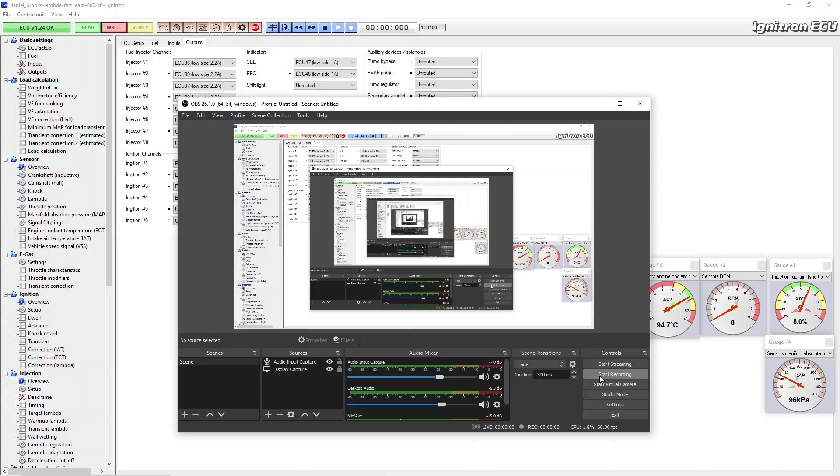Okay, we're recording. What we're going to do in this one is just how I go about boost control. We're on a dyno. It's a GTX 3071 on this car, internal wastegate, forged pistons, rods, etc.

Now you've got choices to start. I've done some adaptations so far off boost, so I've got these learned values which I've actually applied to the VE table. So I'll reset them before I forget. So you've got a VE table that's looking a bit like this. So it's got the beginnings of it.

Now I've actually gone up to 4,000 revs, just rolling on the throttle progressively, just about into boost at 0.4 bar, so 140 kPa this row. And that'll do because it's steady state. It gets things hot really fast.

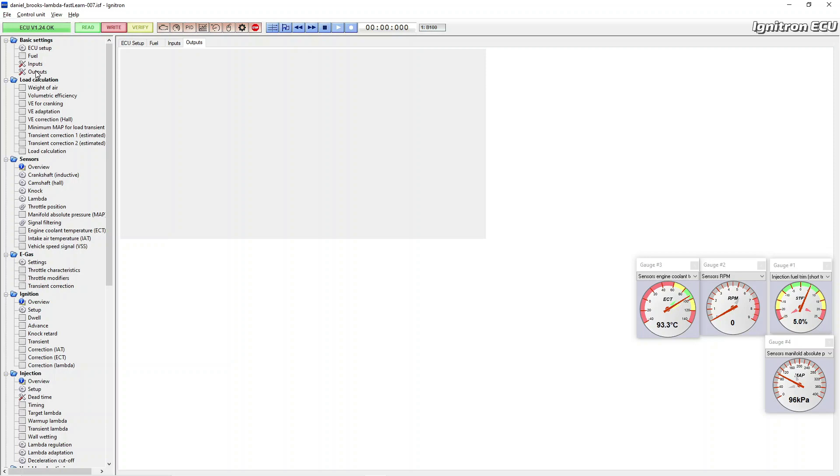So you've got a choice on boost control to either unplug your N75, so you're on actuator pressure. So you can do this on outputs. So turbo regulator 104 is its normal configuration. So that's how it would be if you just done a wizard setting. So that would have some boost.

So you can turn it off either by unrouting it or unplugging it. Unplugging it will pop up a fault code. Unrouting it won't. But if you unroute it, you also lose the boost control menu because it has no turbo to control. So there's different ways of doing it. I'll put it back routed, and I'll do it via the actual boost control menus.

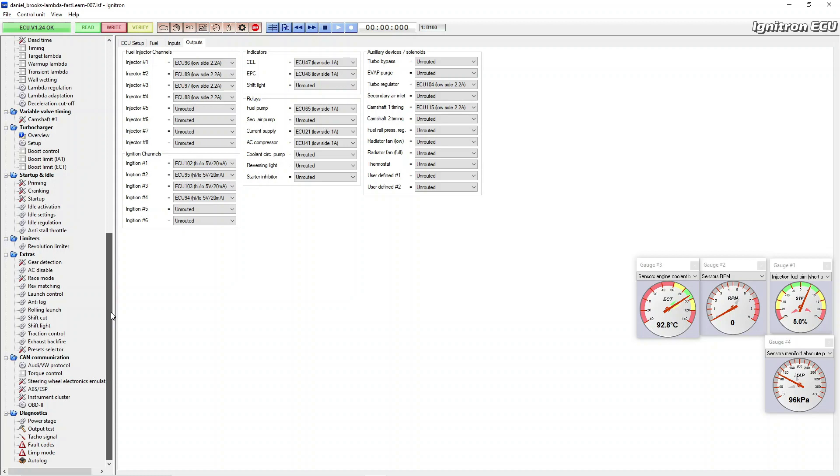So turbocharger, boost control. This is currently only set for one map, so preset 1. I don't know what PSI actuator is in it at the minute, but what I'm going to do is set all the duty cycle tables to 0. So we're in integrator min at the minute, that's set to 0. I'm just going to make the whole table, copy paste, make it 0. Likewise on integrator max, pick a 0, copy it, paste it everywhere. So you can't have any duty cycles.

The default setting is for 250 kPa, so 1.5 bar. I'll leave that for the minute because you can't do it anyway. Don't forget to write that in. So this will give you no boost. So the same as unplugging it or unrouting it, but without the fault codes. So we can embark on starting the thing.

We're on the dyno at the minute, so there's background noise. Hopefully this microphone thing will do a good job of muting noises.

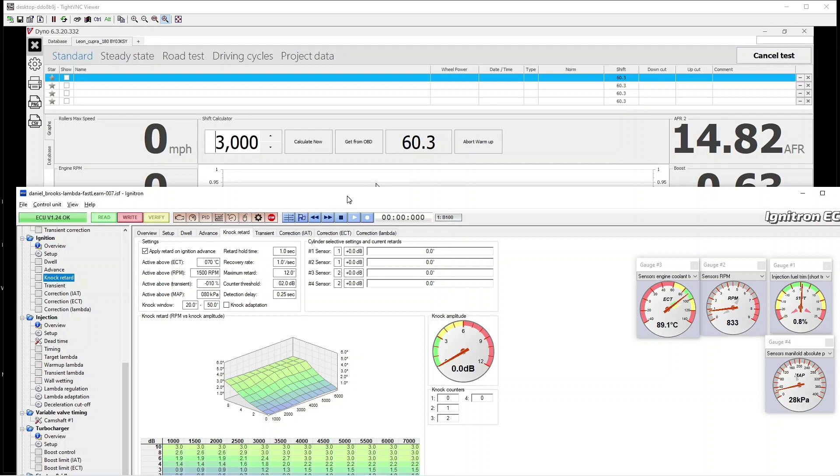So let's go into this, go to 3000 RPM. Tell the dyno, calibrate the roller speed, go back into ignition, drop the screen a bit. Now what I generally look at, because it's an unknown, I'll put it onto the ignition knock retard, just in case it's going to be active, and I'll be looking at if anything's going on in here. I've already created some gauges: coolant temp, just in case it's hot, RPM, short-term fuel trims, and boost kPa.

So just to get it to 3000 RPM. Fifth, teach it, and we'll do a sweep run. Beepy noises in the background from the brake system. Only the front wheels are turning. Not running the dyno linked yet. So where are we? 2,200 revs. Build them up. Get it to 3,000. Teach it.

Sync. What I'll do, dyno stops, do a sweep run. Whether I do full revs or not, I don't know. See what the fuel trims do, if there's any knock intervention going on.

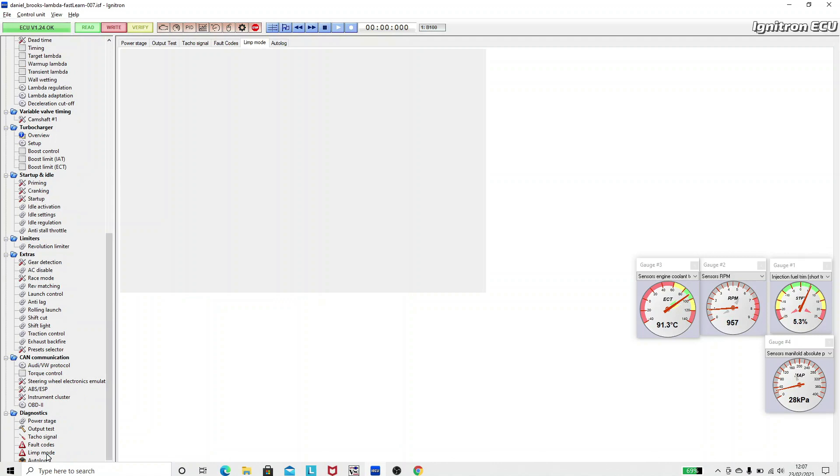One thing I will do, just because I can, go into limp modes. Yes, it's got the default. I always set this down to something less, half what the standard is. So there's three retards, constant cylinders. Just write that in. We'll drop into limp. I always do limp at 25% throttle, no turbo. Write that in as well.

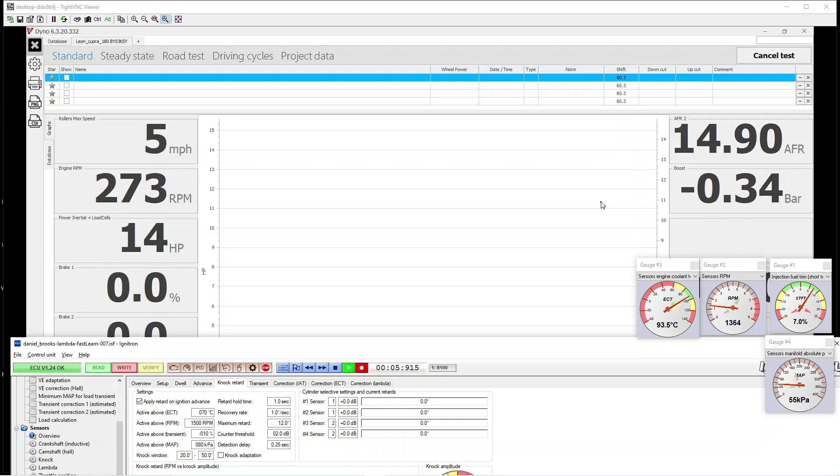Okay, we'll go back to ignition knock retard. Shrink the screen again. Now I do actually start a log so you can see what's going on. Dyno's sat there waiting for me. So let's do a sweep run. Fifth gear, full throttle.

Letting it go down. A quirk of this dyno is even though it's in braked mode, once you've tipped and taught it the RPM, the first run never has the brake. That's it. We'll restart that.

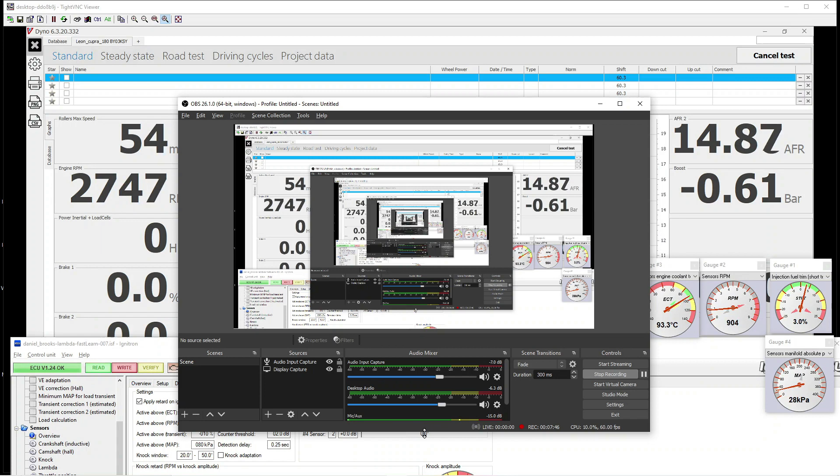Pause this a moment. Okay, should be recording again. We are. Laptop's playing up a bit. So I'm still recording.

Right, so turn this off. Let's do another run. Still logging. Goes down. Stop it. Log that. Log.

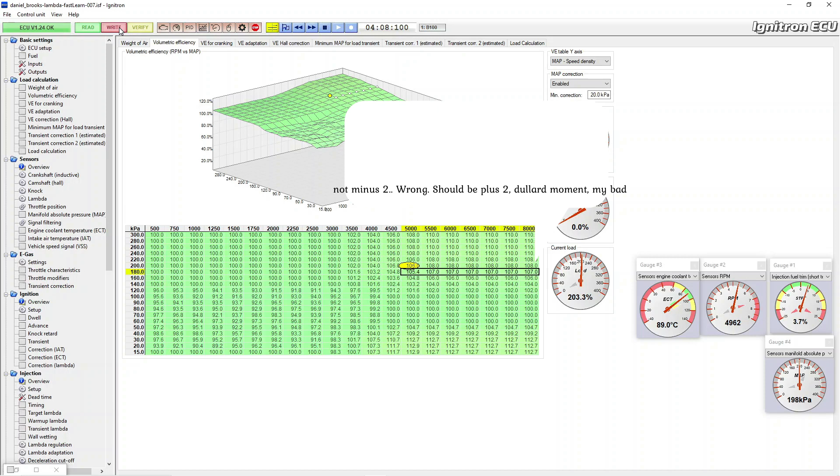Write into ECU, and that was actual data. I did see there was some timing correction going on. We bring the log back up again. So we go to ignition, and a tiny little bit of knock going on there, number 4. So again, same thing. Want to see what's going on in the actual tables. Click the top thing, look at your advance map. And you can see exactly where it didn't want the timing. So right in this range, it was kind of happy here, and less happy up here. So a degree out. It's not the end of the world.

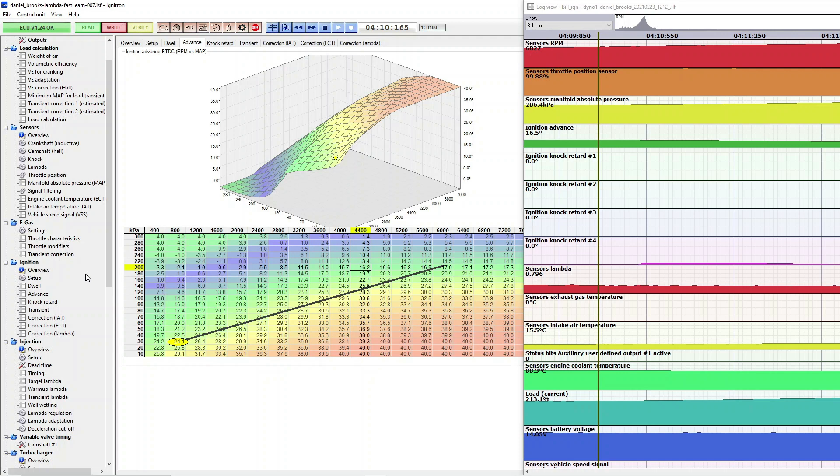I'll actually just highlight that row, nudge it back half a degree, and back to 17. Write in. One thing that's on there is target lambda. We'll rescale this. Okay, well, whilst we're here, I'll rescale this. This only goes up by default to 220 kPa. We're going to be above that, so I'll rescale that.

So double click, have that 300 kPa, 280, 260, 240, 220, 200, like that, 150, like that, 100, like that, 80. So that's rescaling the axis. We've got full axis for fueling. Now we've been in this zone. Just now it was up in the top row, so that's 0.8 lambda, which is a ton of fuel, not a hard boost. So this time we'll be actually operating around here.

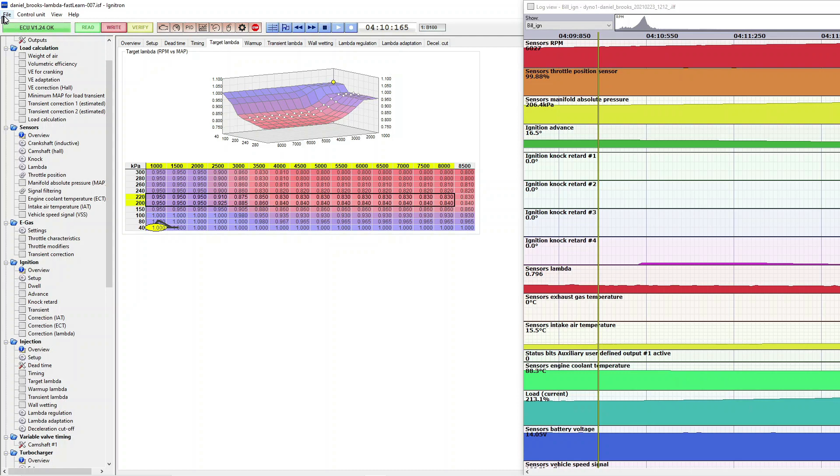So to write it, file, save as, next version. I generally do this, I can always roll back if I screwed up. Yeah, trust me, you're going to screw up. I know I do. Fat fingers on the keyboard mostly. There we are. So that's going to not retard. Minimize the screen again. Just going to get rid of the first run because there's no brake on that.

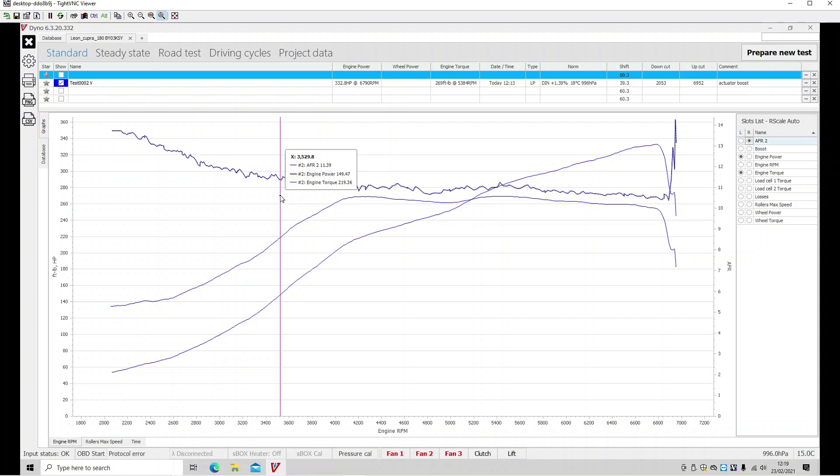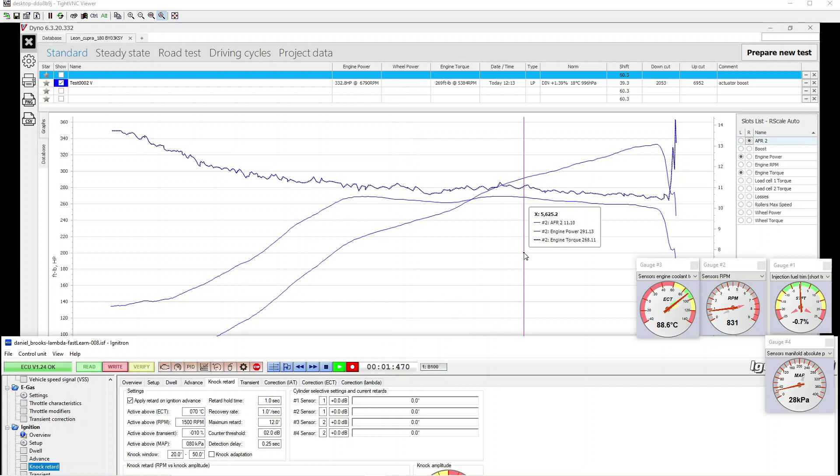So yeah, balance of power 332, 269 torque, boost did the creepy thing. Worse this time, ironically. And AFRs were fat, tens. Okay, car didn't think it was tens. I suspect there's a lambda issue going on in here somewhere. We'll rerun. Let's have a look. So, start recording. Prepare test. Let's go again.

See on the trace on the screen, lambda did go leaner. The target lambda was told to go leaner. Still a difference between what the dyno's measuring at the tailpipe and what the car's reporting.

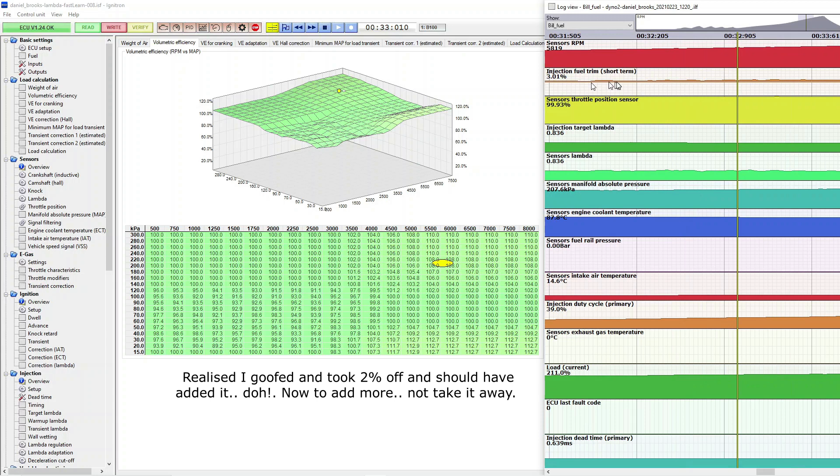So, looking at the top screen around. So adding 3, 4 to 4%. We're adding there. 2, 3. Okay. Right. Add 2 back in there because I took 2 out and I'm stupid.

And on this bit, add 7. That looks a bit heavy. Let's go back a bit. Let's do that. It's back to what it was. Okay. The top end it was actually putting fuel out. It's limited region, don't worry about it for the minute.

Ignition wise, 4 doesn't like it, does it? Still 1 degree. Keep an eye on that. I'm not going to worry about the degree at this point, at this boost level. It's further up the rev range. 6, 6.

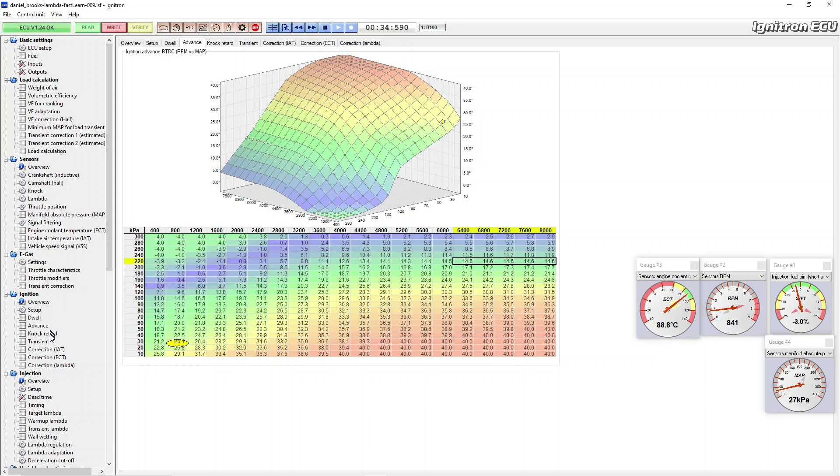Yeah, begin to write your changes. Tip: if you're idling and you do a write, sometimes it will stall out, so you would blip the throttle when you write, so it doesn't stall out. Save as. Back. Okay, so back into knock retard. Shake the screen a bit.

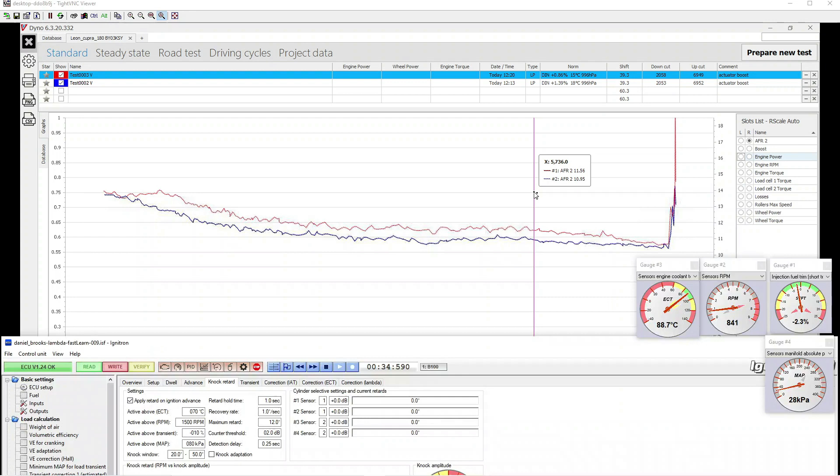Back on the dyno. So let's look at specific things. AFR. Okay, so it did lean out because I told it to. There is a significant offset between what the car's seeing and what the log's seeing. Let's go back into that. Full boost. Target lambda. The car thinks it's doing 0.83, 0.84. Bang on. 0.84.

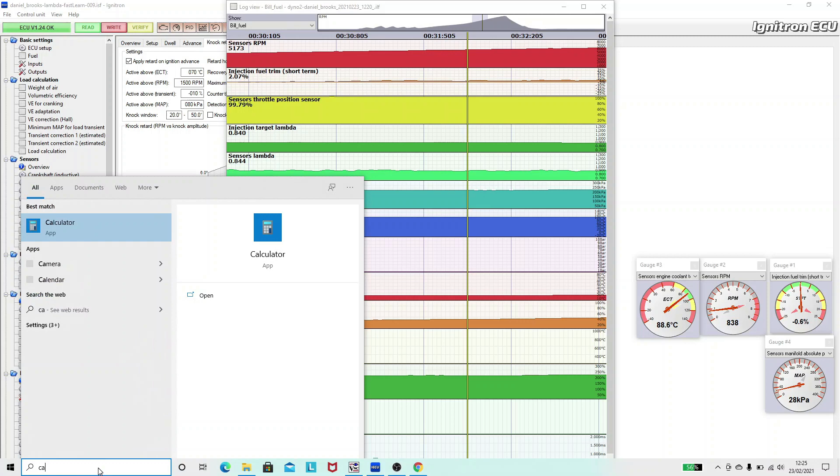So 0.84 times 14.7, AFR 12.3. Miles off what goes into the dyno. So we go to the same RPM point. So we're at 5173 RPM. We're at 11.7, 11.8 AFR versus the car thinks it's 12.3. I suspect a dicky lambda probe. Car's all mine.

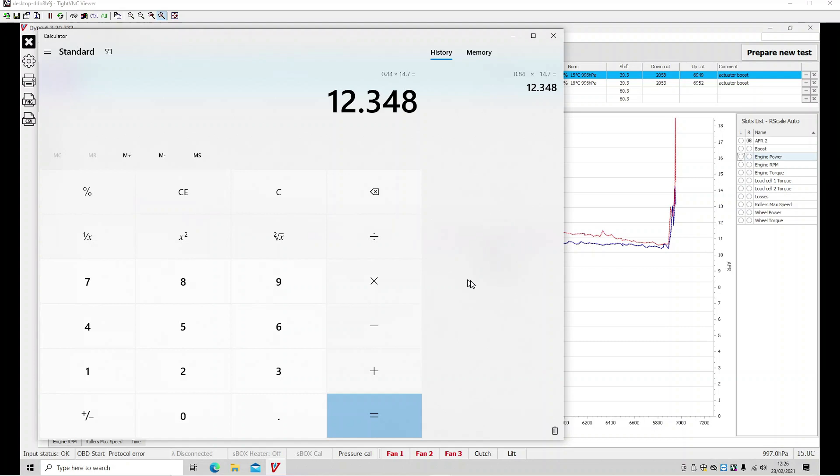Right, we'll rerun it again. I do have other lambda probes for the dyno. So let's prepare new test. Back into here, let's go low, we don't need that. Let's minimize this. Start recording. And again.

Yeah, interesting. So I was watching an actual dyno AFR gauge then, as well as the dyno measurement bit of it, and they track one to one, so there's no weirdness between output AFR from the gauge to the dyno. They are spot on. But the car is saying it's leaner than it is. Save that log. Dyno.

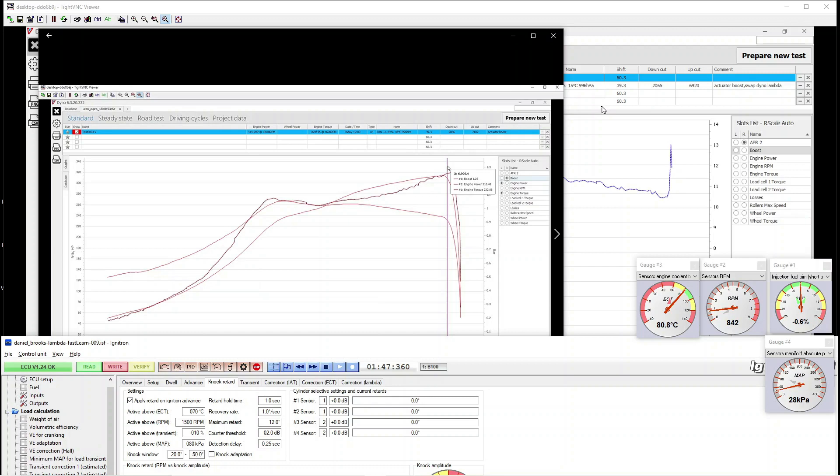Okay, we're back. Changed the lambda probe since the first runs were done. This is one of the last runs. There was an offset between the dyno lambda probe and the car's one by a reasonable amount. So in AFR terms, it was 11.5 on the dyno and reading 12.3, 12.4 according to the engine lambda probe. And we've changed that probe now. So this will be the first run after. Hopefully it will run leaner according to the dyno now, because it was running rich before.

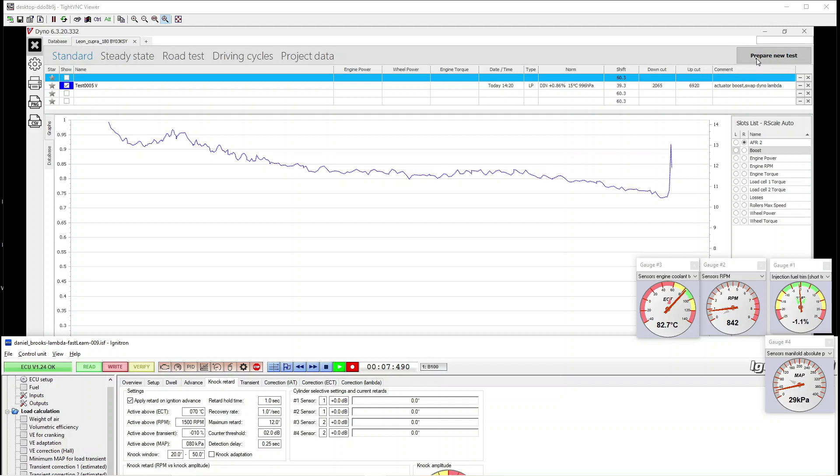So I'll just prepare a run. Not done anything. Just write a note in the dyno. Here, car lambda. I'm going to go for a run. Let's get this back. No, let's get ignition back on screen. We're recording already, so first gear, second gear, third gear, fourth gear, fifth gear, full throttle.

Stop this right this moment. Car's coasting down. File, save log. Dyno, lambda, car. Just open that up. What do we see? Trims. There we are going rich. Lambda 0.82, the 1.4 bar, because of the creep, 1.6 bar, because of the creep.

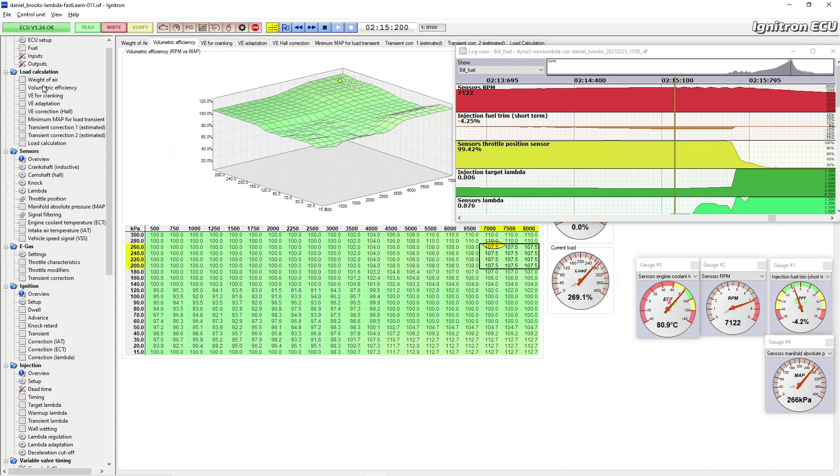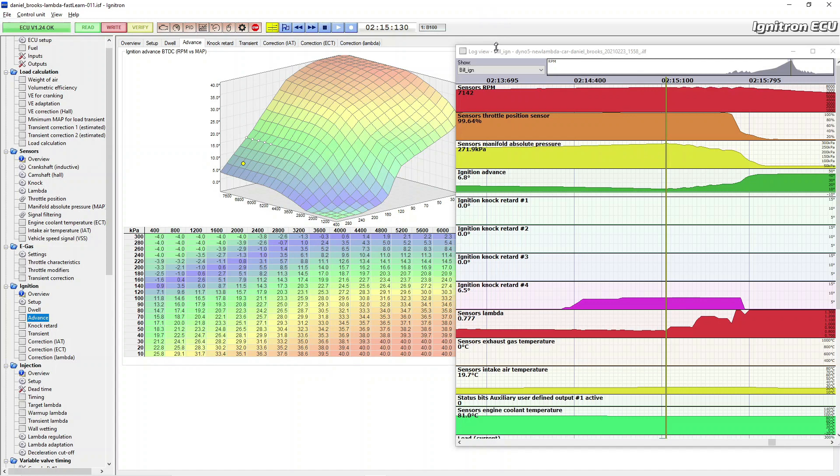Knock going on. Yikes. Yep. Number 4 is not happy. It's only 7 degrees of timing. Shit. Pardon my French. That's not good. Not a good sign. Advance. This is where we are. That run. It's not feeling the love. Cylinder 4 at least.

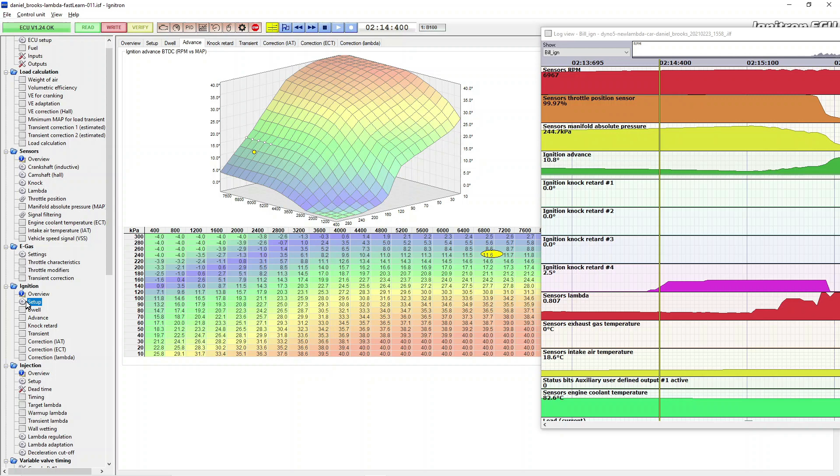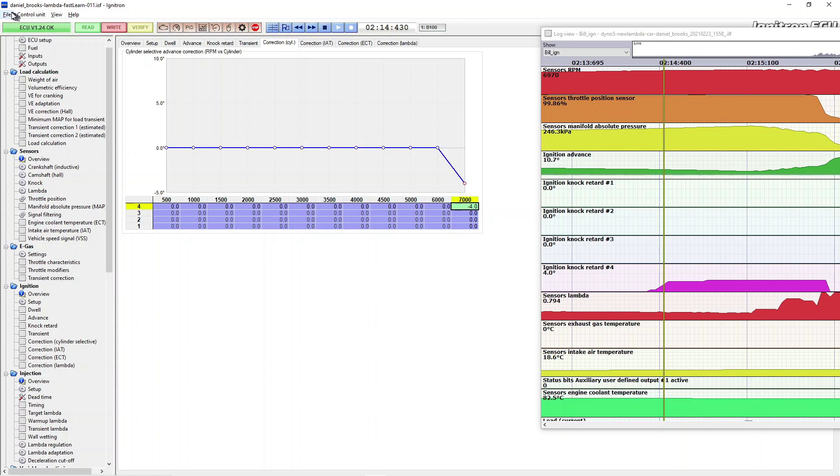What I'm going to do is just enable cylinder selective correction, given that cylinder 4 is being a bit of a wimp. So kind of high in the revs, it's 7 and above, it's unhappy. So I'm just going to stick -4 up there, number 4. See if that does anything. Right, no, stalled it. Start again. Okay. Save.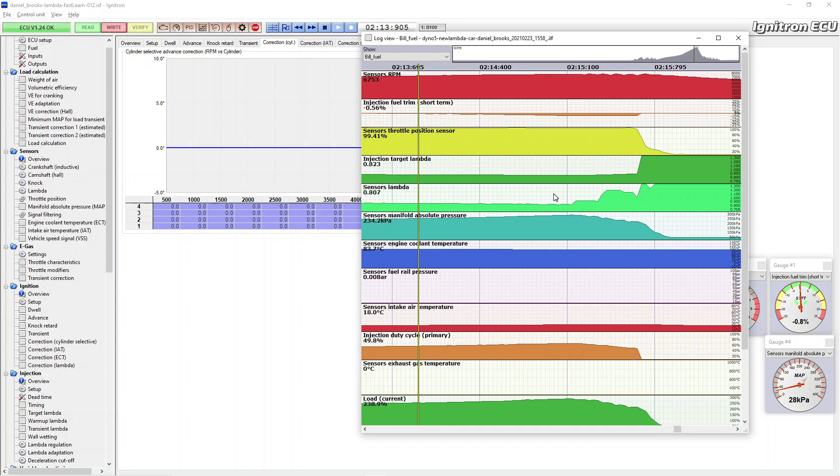Right, let's rerun this. Just check on ignition again. Fuel. Okay, so do record. We'll look at knock retard. So last run we did was number 6, the red one. So just get the other one off screen. Do a repeat run. See what happens. Okay. First gear. Second. Third. Fourth. Full throttle.

See on the screen then, number 4 still lit up. It's disappointing. Save that lot. Dyno 6. Wrong one. Plug. Oh. There she goes again. Yeah, number 4 is not happy. It's 1.5 bar, and this is just actuator pressure. Jesus, 1.7 bar. Really?

Go back into boost control. We can see if we were running boost control, it's 250 kPa. We've got no duty cycles. None. None at all. And she just runs away to 1.7 bar now, nearly 1.8 bar. Ridiculous. Okay. Maybe some investigation. We'll plumb it direct, bypass the N75 valve in case that's just plain wonky. Yeah, it's not like in boost. I'll stop that for the minute. We can carry on. So I've replumbed it for direct actuator pressure, no N75. See you in a bit.

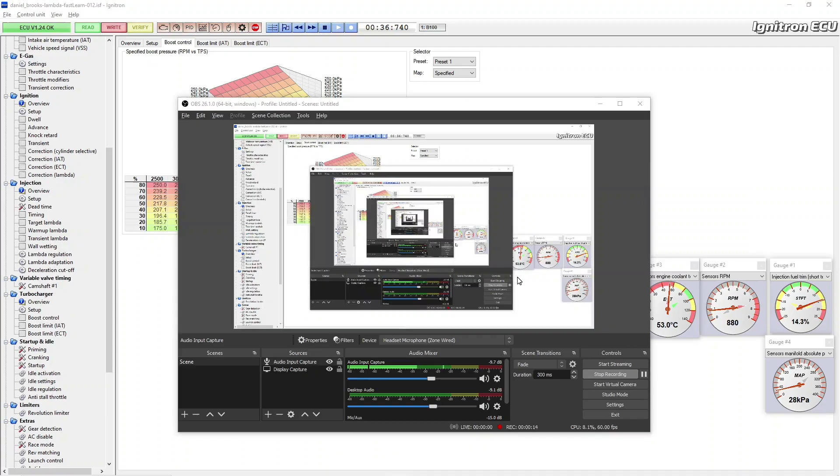So back to the ignitron screen. So this is like the default boost request, boost control. It's on preset 1, there is only 1 currently. If you recall, I'd set integrator min to 0, I'll leave that there, and integrator max I'd also set to 0 to essentially give us no duty cycle. So we literally are wastegate pressure, obviously with creep. From experience, I know that 1 bar, I'd start off with something like a 30% number for a duty cycle. So I'll copy that and plonk that in the top row. Be 0 at the bottom. So I'll just do a linear thing, vertical interpolation, give ourselves a flat looking duty cycle map.

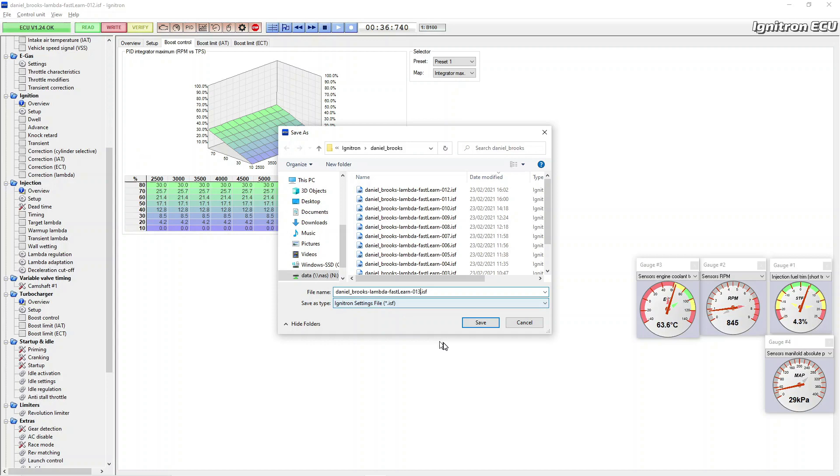So this will be what it's going to use as a duty cycle to the N75 with its PID control as a starting point. I'm going to leave the integrator min at zeros for now. I just concentrate on the max. So I'm just going to write that in, save it, next version. One thing I need to check is, well, actually the limits set to boost requests. This is inlet air temp, so we're allowed 1.6 bar, that's enough. Engine coolant temp, we're still a bit cold at the minute, so it's not going to allow us full boost until we get to there, but then when we do, we're at 1.6, that's fine. Car's still warming up anyway. Limp mode's the other one. This is set to 250, so we need to give ourselves a little bit of headroom on this. Not too much. We'll give ourselves 265, just for some random number.

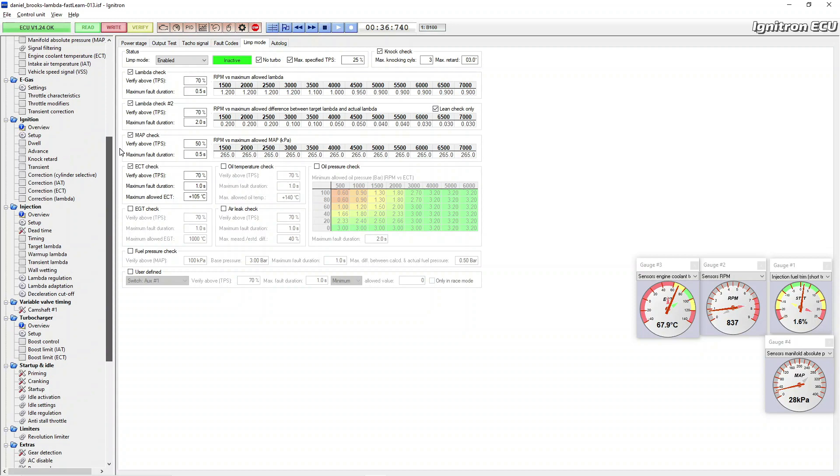Again, save that. Map check. 2 seconds is too high to my mind, so half a second. And I personally prefer about 50% throttle. Everything else is kind of alright, so save the file. So I'm going to go back into knock because we are very knock limited on this engine. Seemingly it's a 160,000 mile block with some Wiseco pistons dropped in and honed. I won't say any more on that matter. So we'll do another run.

Prepare new test. So this one's going to be 250 kPa, which is our boost request. We'll see what it wants to do with it. We'll start that. We'll start recording and turn the main fan on. Okay. First gear. Second. Third. Fourth. Nice of that coolant temperature to get up to 70. There we go. Bingo. Full boost. Full throttle, I should say.

Okay, it's coasting down. Save that log. Dyno 8, 250 kPa. What the boost duty cycles are doing. Okay, so look for my boost template. It's wider on screen.

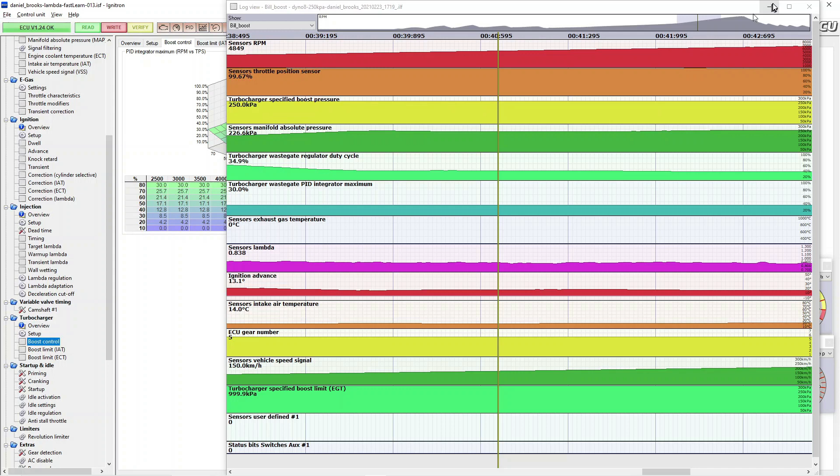So what we can do, we go back into our boost control. Here's our duty cycles. Essentially, you can just give it some more. I'm doing highlighting on that. So we're at 30%. We're not doing it. I'm going to give it 40%. Flat 40. To write that in. Doing that's quite laggy.

So we could, if we wanted to, increase these numbers. We won't in a minute. I'll get a feel for what that 40% actually does. So we're going to do another run. Start recording. Get the log. Oh no, I'm recording. Let's ignore that. So, log's recording. Let's go back into knock retard. Squeeze the screen a bit.

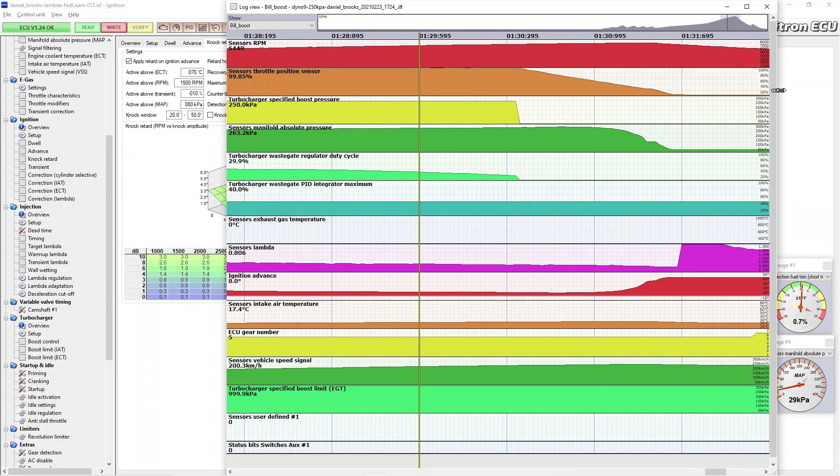Up and along. Let's get to some boost. Scroll down some RPM range. So, 5,000, 40%, still not quite making it. We did more boost, so we're up at 240 kPa. We're into the creep zone now, so 40% was adequate at 5.7, only because of the creep.

So if we're going to add duty cycle, we don't need to add any duty cycle after 5.5, because it's running away at that point. We can put some duty cycle in earlier. So we're at 40, 41, cap of 40, 4,000, we're still only 1.2 bar, so we can afford to give it more headroom. So a quick check on fuel. So we've got some more boost. Engine's looking decent, adding a little bit.

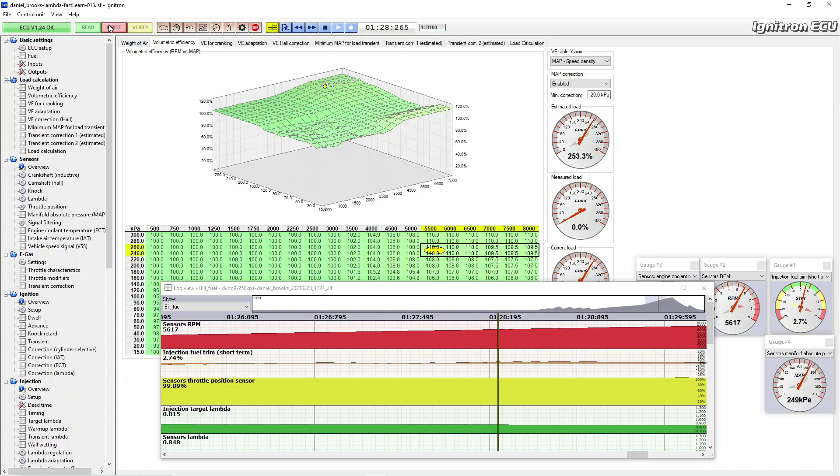Let's have a quick check of how's the ignition doing. It's actually gone quiet. Interesting. So I suspect the knock that we're seeing is a little bit still there. Number 4, full revs. I suspect we're actually just seeing piston slap. High mileage engine, drop-in forged pistons, clearances are not going to be correct. It's going to be very baggy. So it is quite a mechanically rattly engine.

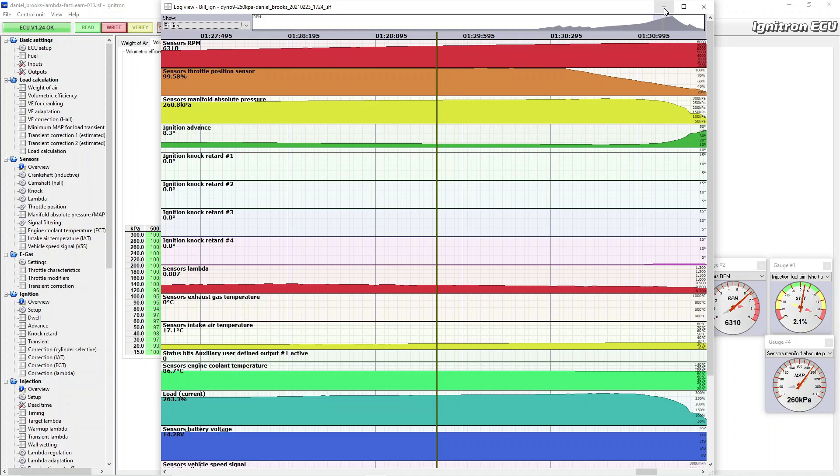So knock sensors, good as they are, mechanically noisy engine will influence them. So go back to boost. Boost control, duty cycles. As I said before, after 5 and a bit, it's doing all that it can because it's running away. But we could do a bit more duty cycle early on. So I'll nudge this up to 45.

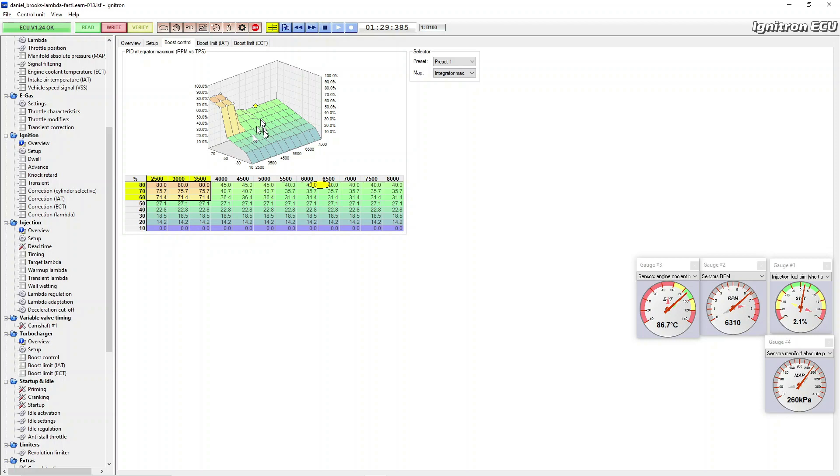Now, and to try and get it going sooner, I'll actually bump these up quite a lot. Try and get the wastegate nailed shut. Really, that. Nudge this up. Bring that slightly down. 43. So see what this does in terms of spool. Save the file.

To not retard, shrink the screen, hide the previous runs, don't really care about them. So lose that run, so let's compare the last run to the one before, boost for boost. Okay, so you can see we did get some more boost, 1.55, then it fell away a bit, and then up to here it crept by 3, so this is our operating range. But we did make more torque, so up to 324 torque now. I'll take that. Okay, so that's just the last run, let's go again.

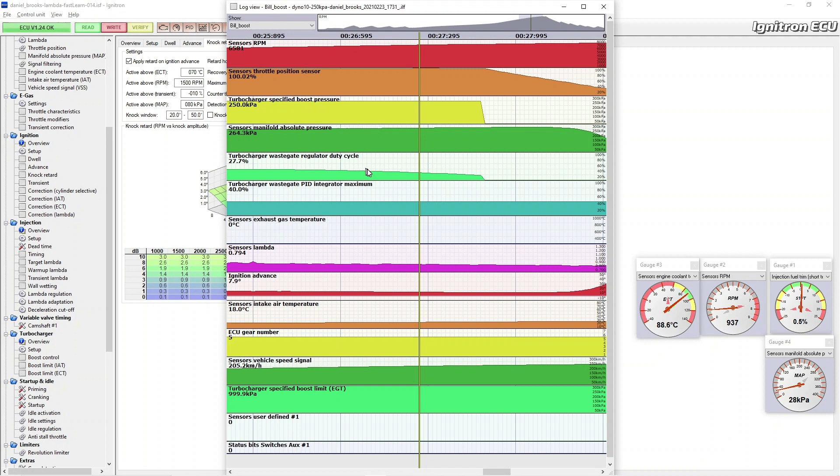Log. Yeah. Open the log. Okay, just boost. Wastegate duty cycle's flat, closed. 3.6, reduces down. Boost is climbing a bit, so we'll get to 1.5 bar at 4.2, using 50% of the duty cycle. Slightly go past that momentarily.

So not so bad. And we're still not enough. Here we are, 5 again. So we get a bit of a dip. So we have a bit of a spike. Drop back to 244 kPa. So that's at 4.8 RPM. What does the dyno say? Oh, look, there is a spike. Yeah, so we did spike. More of a spike on the dyno than there was, but that's because I've got the wastegate set flat. We get this slight wibble going on here.

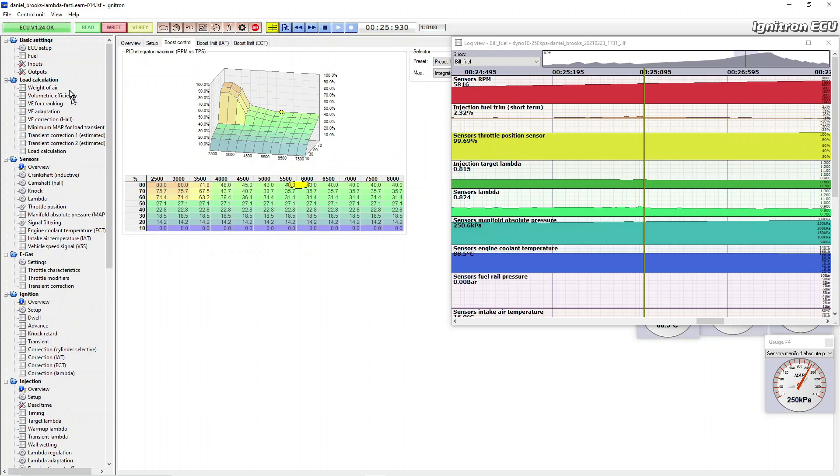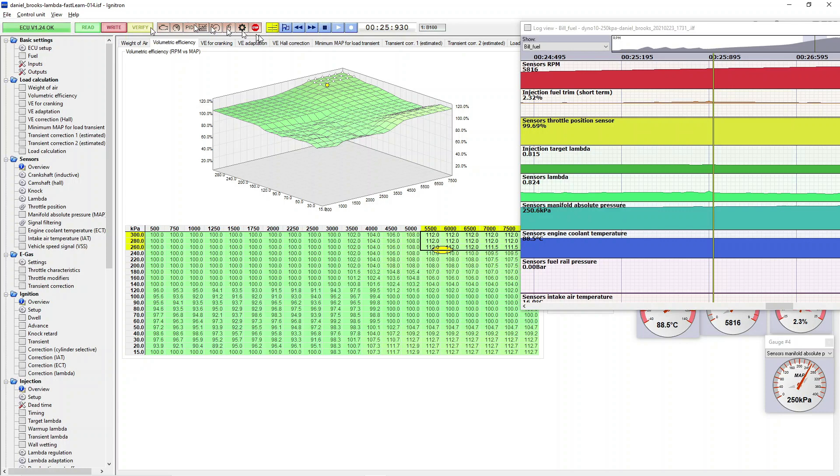Percent. Look what that is. Around here. Okay. Go up a couple of percent. Let's check what's going on with timing. Cylinder 4 still the problem child. No. But again, we've only got 11 degrees, 10 degrees, 9 degrees of timing anyway. Okay, that's a good sign. So we're just going to get a boost kind of where we want it. Let's do another run.

Some stuff. Not retard. Screen. Test. Hopefully got less of a spike. Find out shortly. Okay, first gear. Full throttle, fifth. Might look better. Well, yeah.

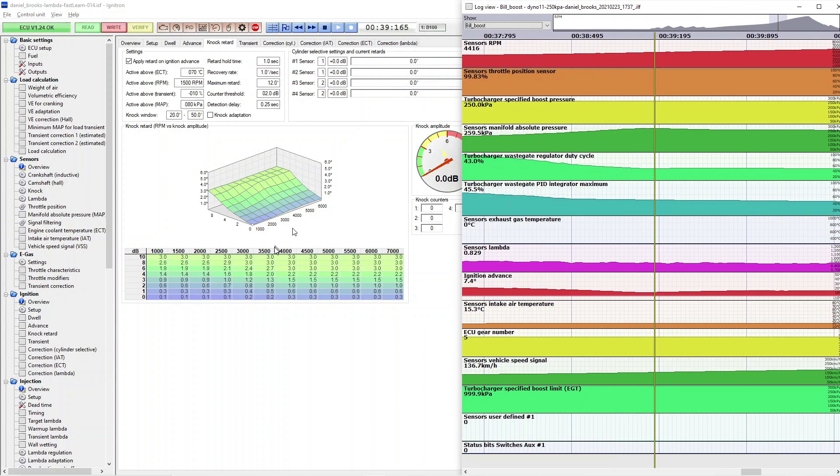Boost. Spike around 42. Less of a spike. Bumped to 260, as the dyno suggests. Boost. Let's lose the red run. Yeah, we did reduce it. Not a great deal, but we did. So, yeah, 0.1 of a bar. So I need to do more of that. So, back into control.

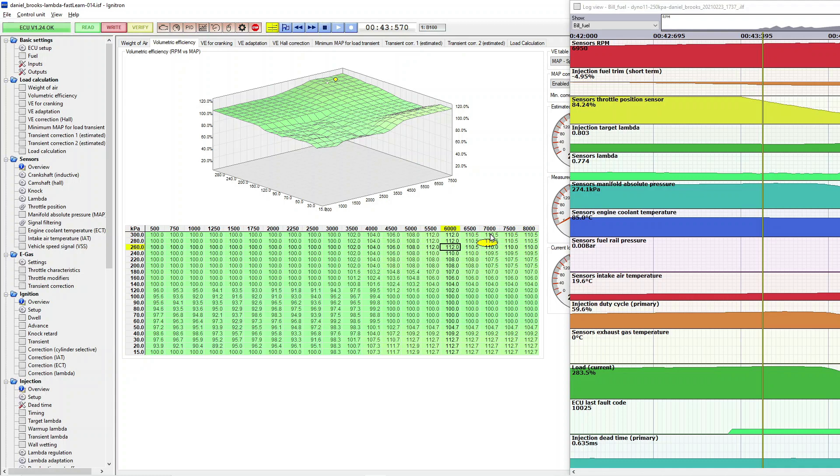Maximum 45 there. Bring that down to 43, like the cell next to it. This one too. Down at 45. Check the fuel trims. Fine until the limiter. They're really rich. Won't fuel up here, that's for sure. Likewise. Okay.

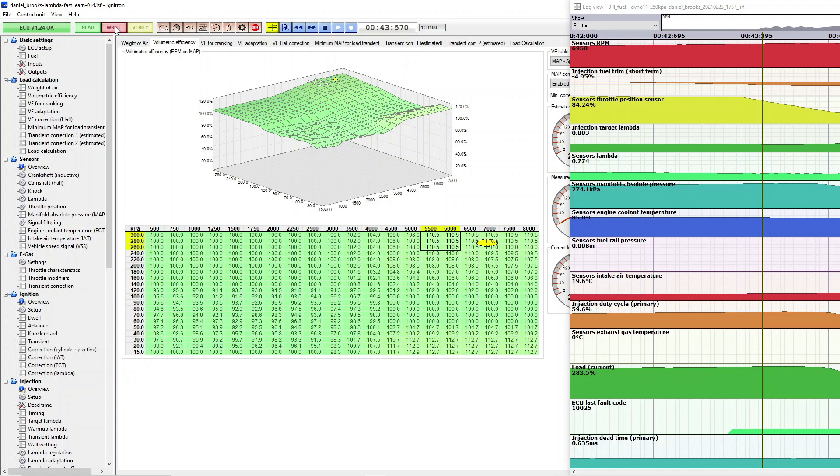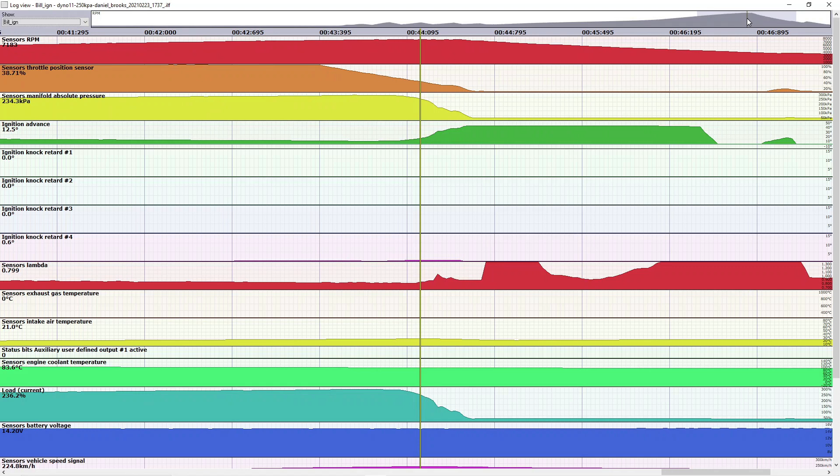And quick check on timing. Timing. Still quietly moaning. That's on the overrun. Yeah, which to me just really confirms it's more rattle than anything. It's on overrun and liftoff. Actually under load it's been alright. Okay, so save this. Let's write this. Save as. Next version. Let's lose number 11. Test. Go. Second. Third. Fourth. Fifth, full throttle.

Save the log. Dyno. 12% throttle. 250 kPa. We're climbing now at 4. A bump. We actually need a bit more. Interesting. Again, the bump's gone down a little bit. I've seen just a bit more of a bump there.

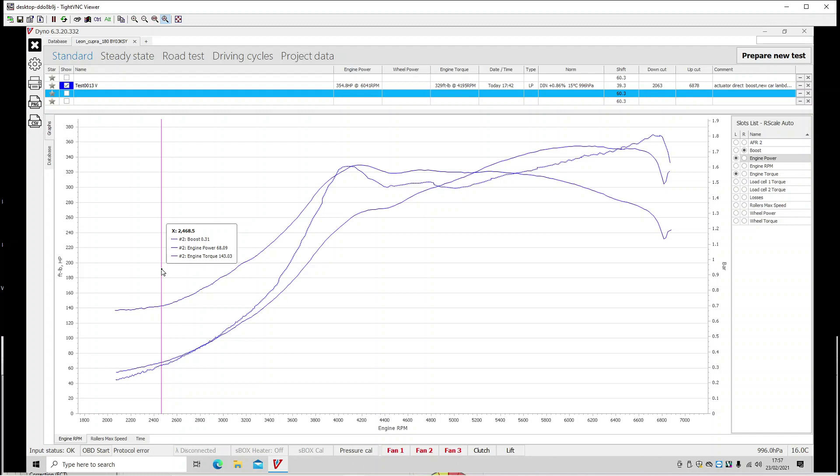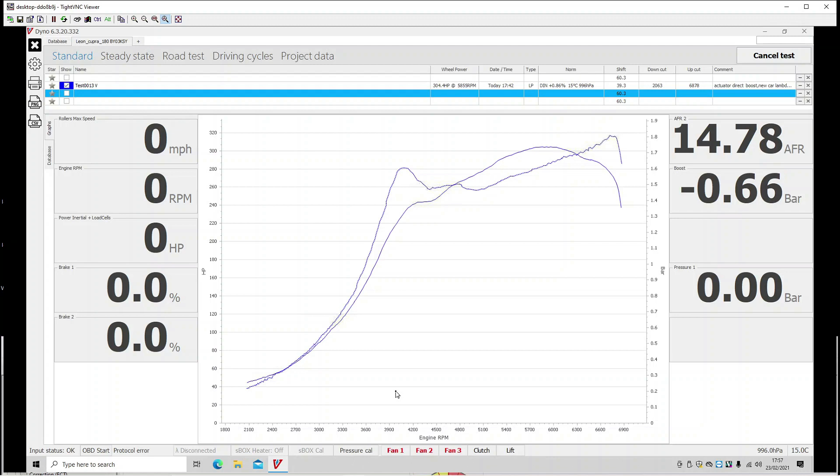The map sensor on the dyno is near the throttle body. The fuel pressure regulator before, but it's got a load of other stuff hanging off that. The map sensor on the car is closer to the map sensor on the dyno. So just redo a test. I have backed off some of the... start recording. Fifth gear, full throttle.

Didn't overboost. The dyno say 1.5 bar, fell away to 1.4. 5,000 revs. What did we have here? Same. Okay, so it's actually wanting more duty cycle now. 43 is okay at 4.4. And 5.6 is okay. So 4.4 or 5.6, a bit more duty cycle wouldn't go amiss.

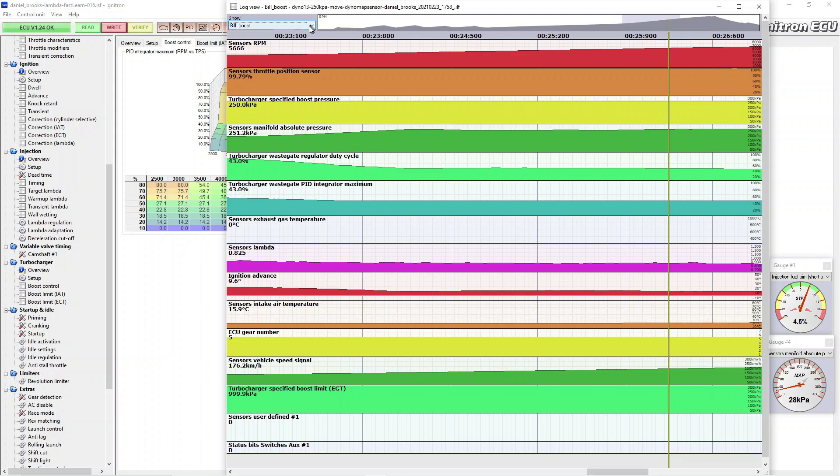Back into boost control. So essentially in this zone. Right, up that to 45. Same here. Like that. Check timing. First because I'm there. It's good. Ignition. Pretty good, apart from number 4 again. Just at the very top.

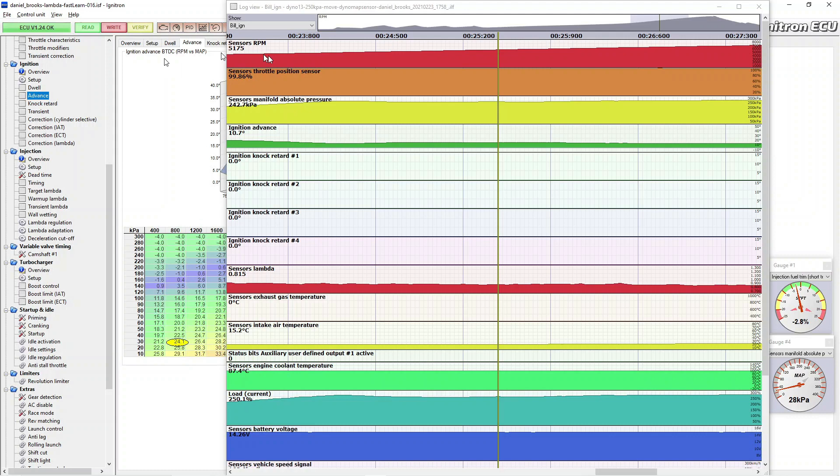What I'm going to do, just because I can, is this region. Add a degree. 5, yes, it's got to 12 degrees. See if it makes anything of that in terms of torque, whether it just rips it back out again as timing knock. So, save file.

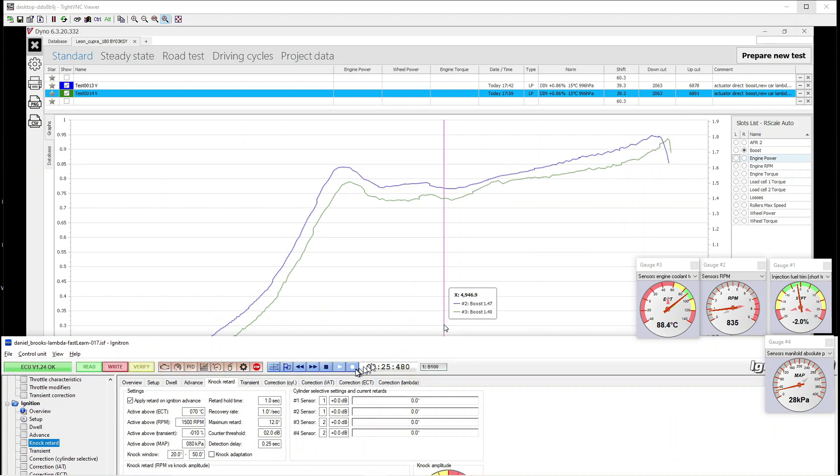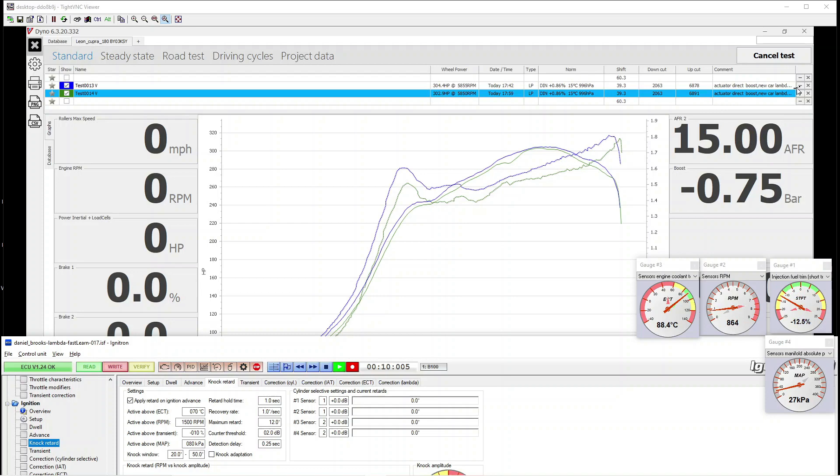Knock retard. Start recording. Test. Let's get rid of the run. Fifth gear, full throttle. So on the screen there, cylinder 4, all lit up like London. The other cylinders may have been fine, but something's going on inside number 4.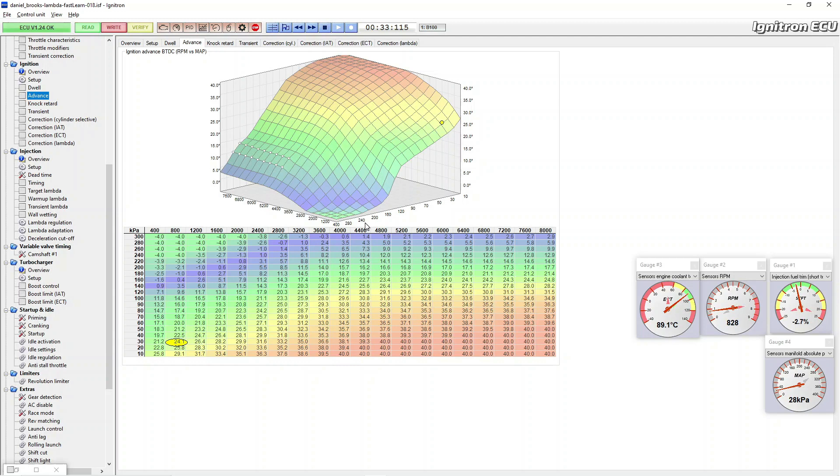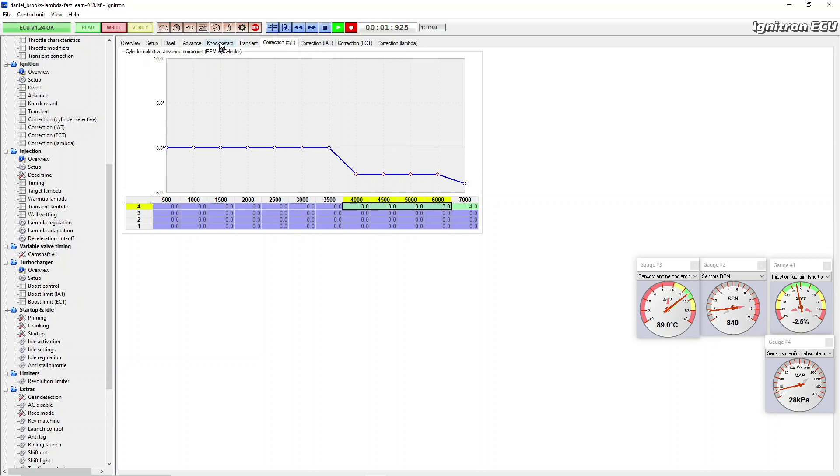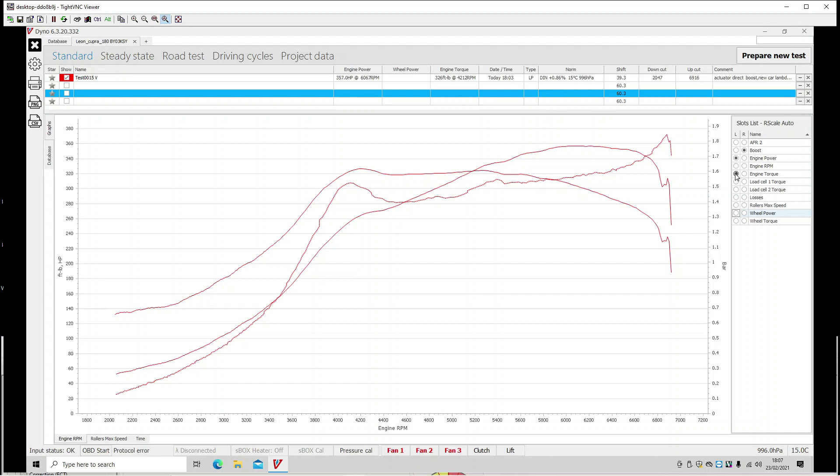Ignition. Go back into timing control and take back out what I put in, because number 4, no likey. Cylinder selective on it. Preemptively pull out 3, see if we can leave it in the others. Suspect it won't be enough. That. Okay, let's record. Up retard. Let's lose 14. Test, go. Throttle, fifth.

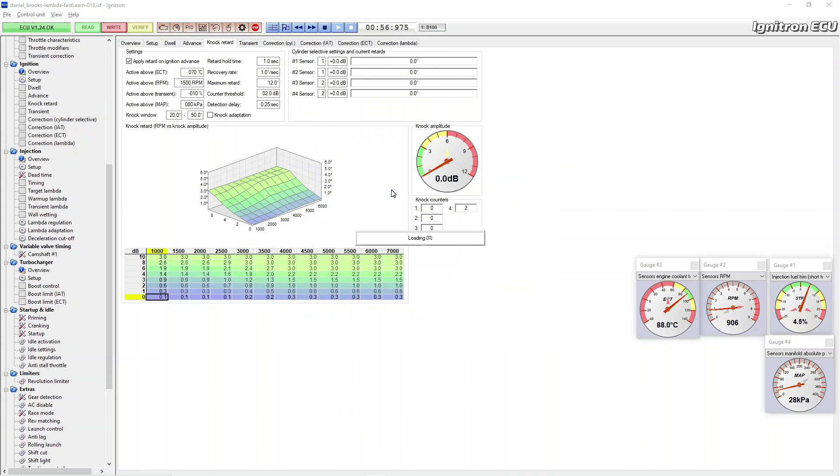Well, cylinder selective knock seems to have dealt with number 4, if that was actual real knock, or the retarding itself did nonetheless. Okay. So what's going on with boost? Right, one target there. Slightly above. Pulls it back. Pulls it back, a bit too far. 47. 48. It's a bit more back on target.

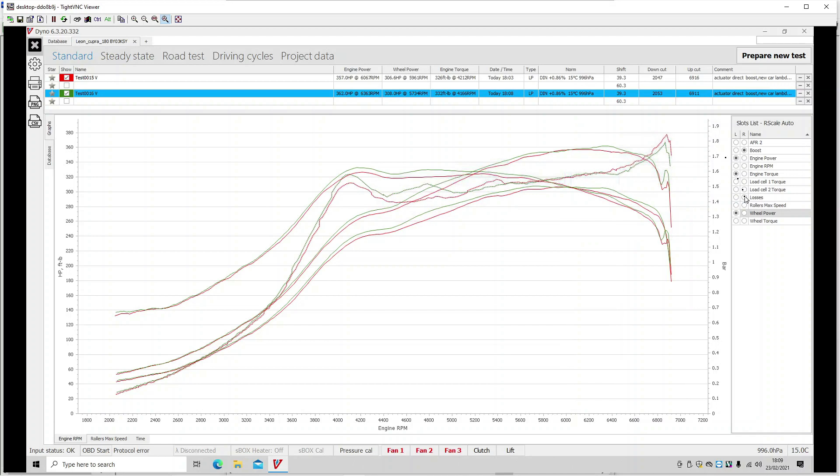So this log doesn't look too bad. The dyno makes it look worse, maybe. Green one's last run. To 1.5, that's 0.04. Resolution is making it look bad. So it's kind of getting there.

So, key points, just to sort of round up this video, could go on for hours, no doubt will on this car, is you've got a requested boost pressure, you've got an actual, you've got your actual N75 duty cycle and the integrator max that you've set. So it's a balancing act of the integrator max and achieving the boost or exceeding the boost by whatever amount. Then if you overshoot too much boost, the integrator max is too high, you bring it back. So you use that to dial in the boost control.

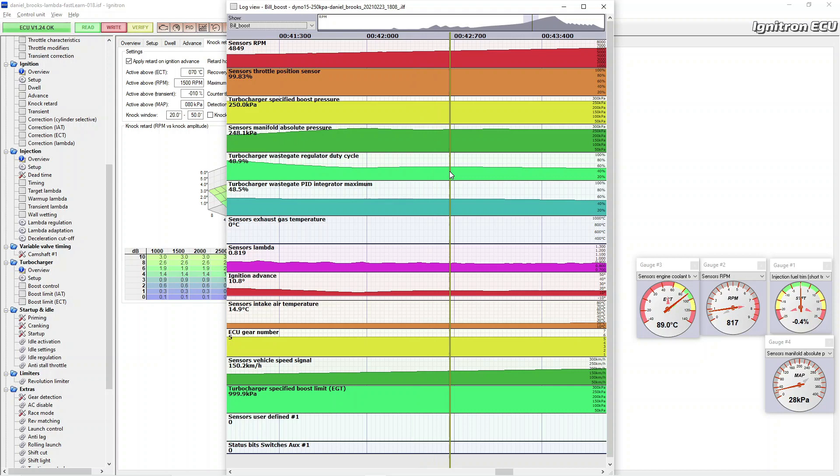PID will do a pretty good control loop based around the integrator max setting that you tell it. So start slow at a lower number, work your way up. It's a safer way of doing it. So you get to find what duty cycle achieves what boost. Then the PID will do a good job of controlling around that number to achieve what you've wanted. So we started at 30%. You can see we're actually at, on the log, something like 48% integrator max. So in this table, this is where we're at now. This was 30 as a start.

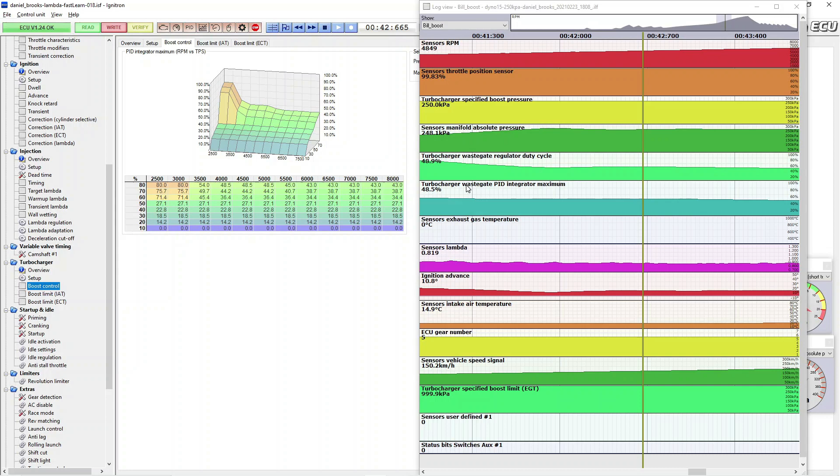So start low, work your way up, have your boost request, do your data log, create a profile like I do on templates. It's much easier to zoom in on the parameters you want. So RPM, throttle position, manifold pressure, requested boost, and the duty cycle request, the actual. And using that, you can sort of dial in the boost control on the PID. Once you're finished, if this was finished, it isn't, but I'll kind of show what goes on.

If you highlighted the whole thing, copy, Control C, go into integrator min. Remember we set this to 0. I'm going to paste that in there. It makes them both the same, but what you do is an expression, multiply that by 0.7. So we're essentially taking 30% off it. So that's then the tolerance band between min and max that the duty cycle is going to use for its PID control. Set the min once you finish doing the max. The max does the bulk of the work.